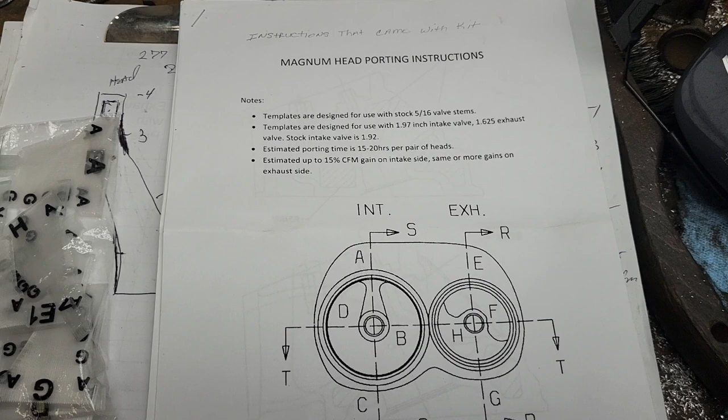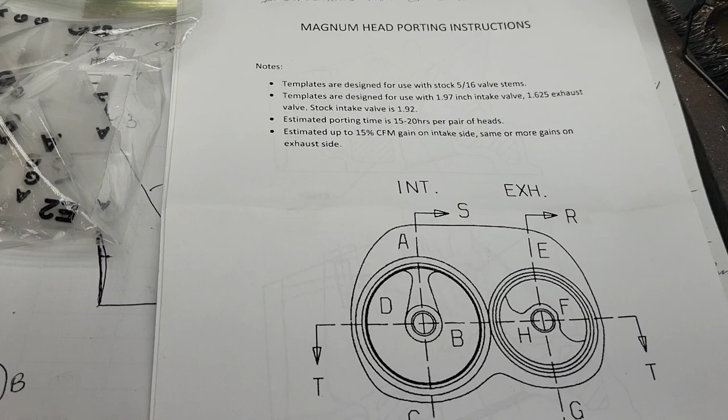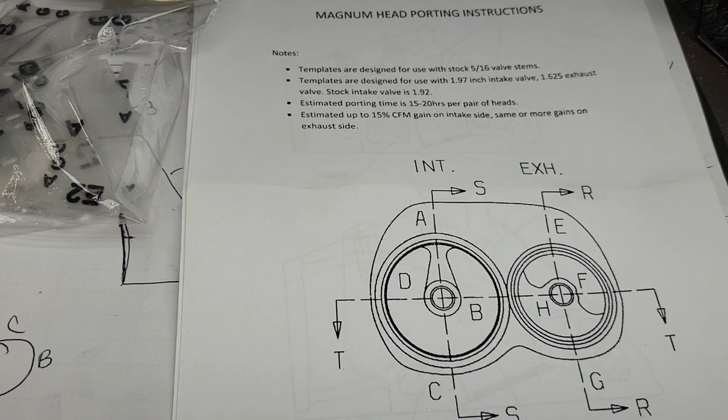Templates for Magnums, and he wanted me to put them in and critique them. Well, I don't know about that, but I do have my junk Magnum that's cracked that I got some good flow numbers out of. I don't remember exactly what they were, but they were pretty good for what it was. And we can compare

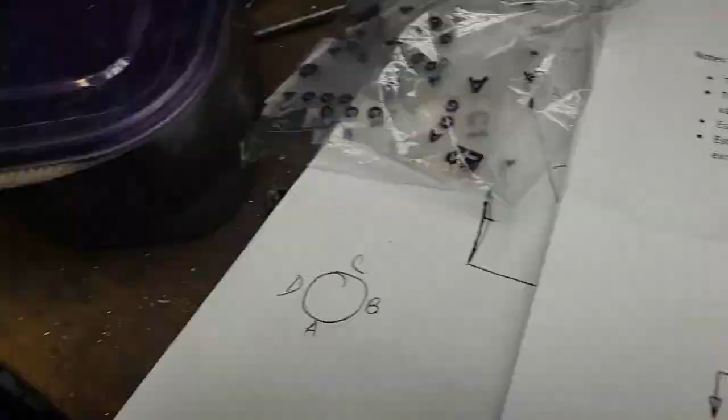These templates to what I did, and we'll see what it looks like. It's got quite an extensive book of instructions. Okay, like it says here, sorry guys, estimated porting time, 15 to 20 hours.

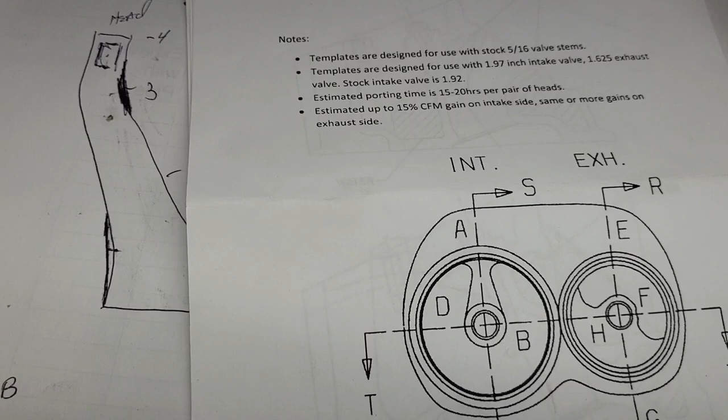Oh, I guess it could be done that quick. I can't, not a chance. I mean that's like a cleanup for me. But then again, I've been accused of a lot of things. Being fast is not one of them. So I'm going to have to pause you guys a lot in order to get in and out of here and do what I got to do, because I got to figure out every single piece, because I don't know which one goes where. And we'll take a look at it all.

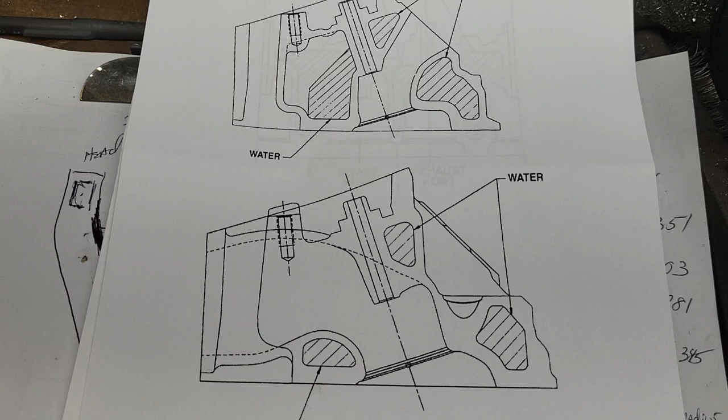Okay, next page gives you the basic shapes. As you can tell, stock shapes are really good on the Magnum, really good. I like the high short side radius. Remember, it's designed for a heavy truck, very similar to the heads I got on the bench right now, the Dart 165s, designed very similar, all right?

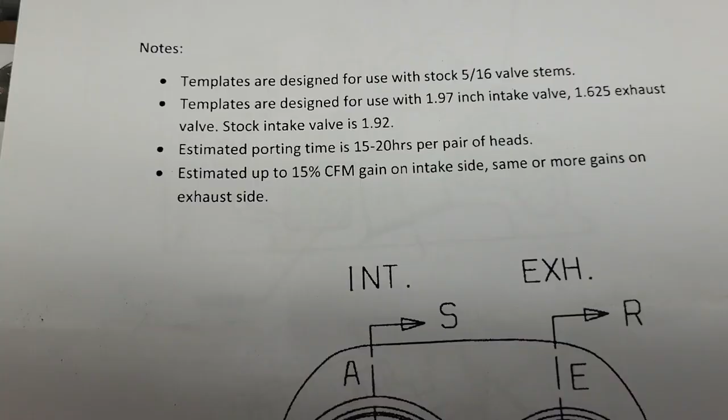The high short side radius definitely helps your mid-range torque. Estimated up to 15% CFM gain on the intake side, same or more gains on the exhaust side. Okay, so they're designed for 5/16 stems, which is what this head is.

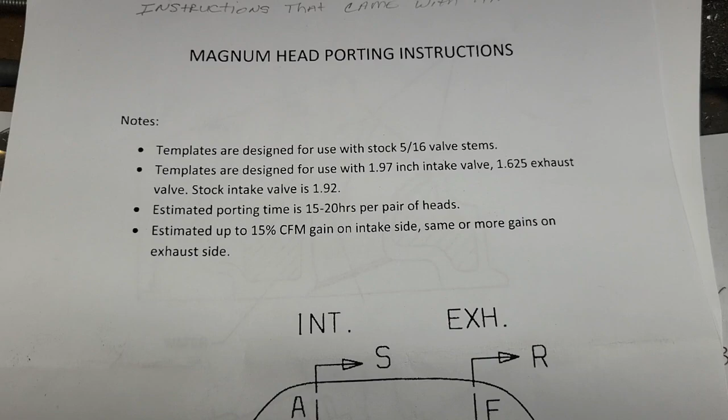Okay, these are designed for 1.97-inch intake valves. I don't remember if I cut these for bigger valves, guys. You'd have to take a look at the Magnum video and let me know, because I'm not measuring them.

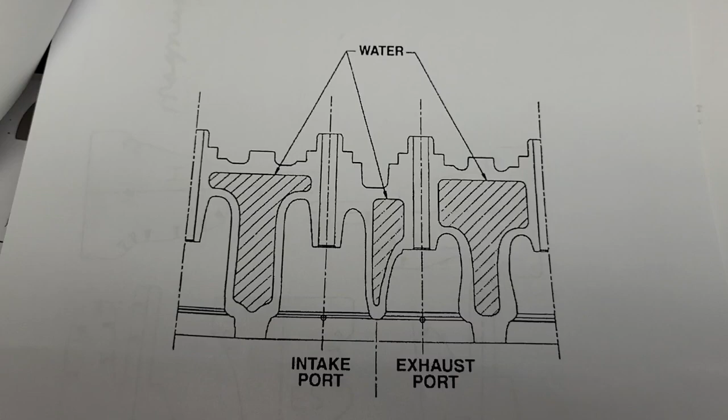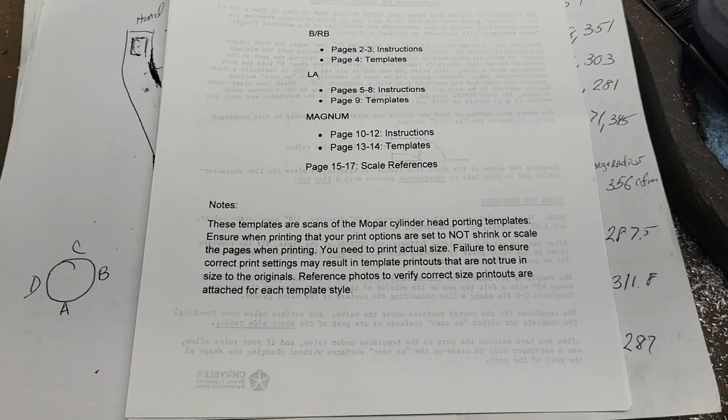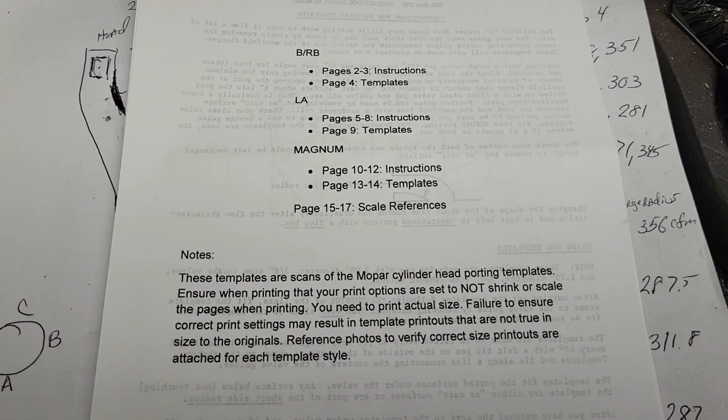Okay, nice drawings of where the water is and the basic port shapes. Looks good. Okay, this is all the different templates that are here. It's quite a bunch of them. Okay, it looks like they have one instruction book for B and RB engines, LAs, and Magnums. So we're going to be paying attention to the Magnums, which is page 10 to 12 instructions and page 13, 14 templates. I think this is an interesting page right here.

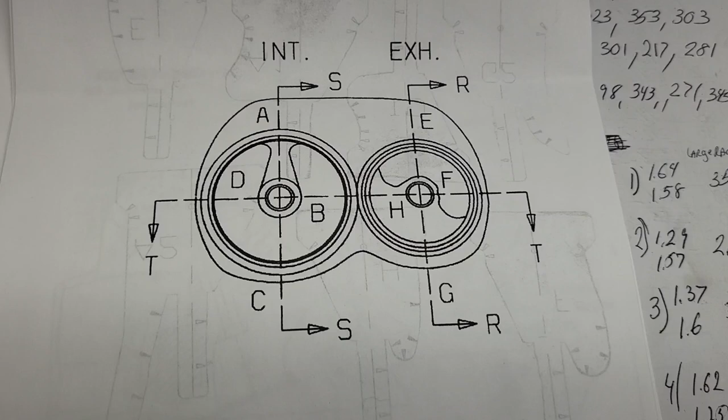Okay, now it says... okay, that's a BRB, sorry. Okay, this tells us exactly which template goes where. We might as well start at A on the intake. Let me find that one. Okay, take a quick look.

Obviously, I used a way bigger valve than the stocker. And our porting template for A, now if I understand the way this works, okay, it should fit in there, but it doesn't, it doesn't even come close. Now remember, this is supposed to be the final shape.

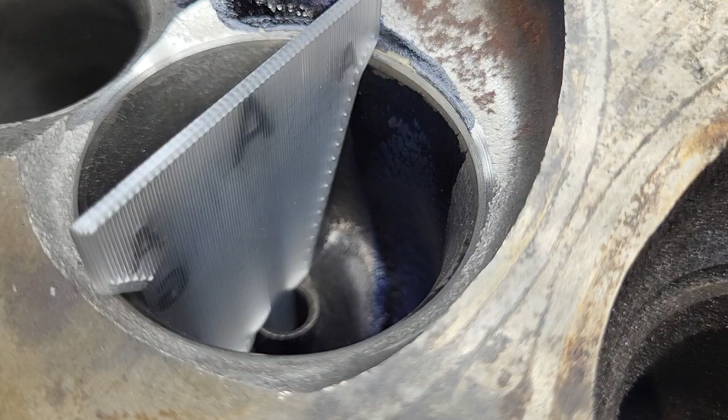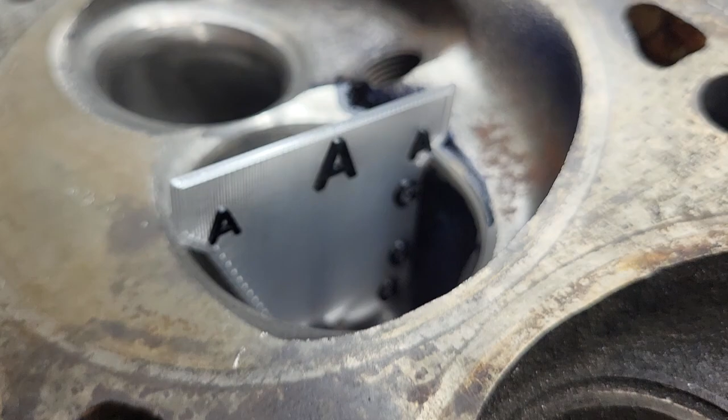Not sure, guys, I don't think that bowl is that shallow. That's not going to be right. Okay guys, now I got it. CCC must be the side it's supposed to be on. Now it's not easy to see, let's see if we can get some backlighting on that. Okay, the stocker won't even fit in.

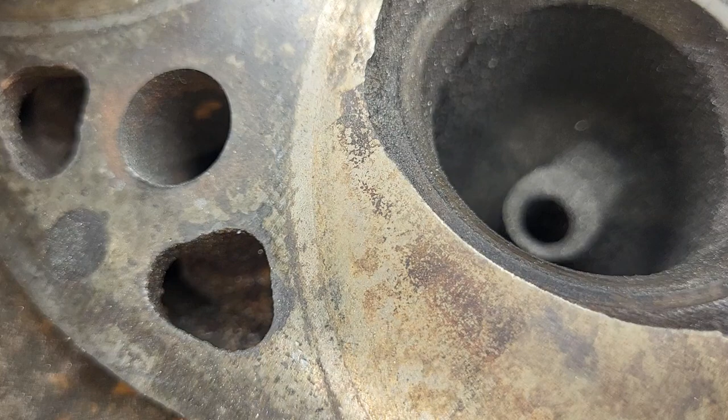All right, this may not be the easiest thing in the world to show you guys. But they've got that bowl much straighter than I do. But remember, I also have this cut for a bigger valve. Okay, they have a very, very straight wall on that intake, if I'm doing this right.

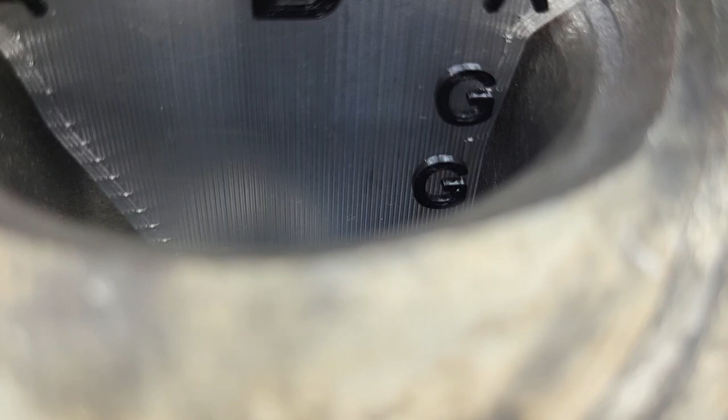Okay, we're going to look at B. Hard to see, but I've got my bowl. Actually, that's got the shape of the wall pretty close to what I did. Let's see if we can get a different view of that. Okay guys, fiddling with my lighting a little bit. Hopefully we can get something.

You can see the tip of that should be hitting the roof. I went a little deeper than that, and I gave it way more area on the roof. Must be somebody walking by with a dog. I made it much wider than these. Let's see what that looks like on a

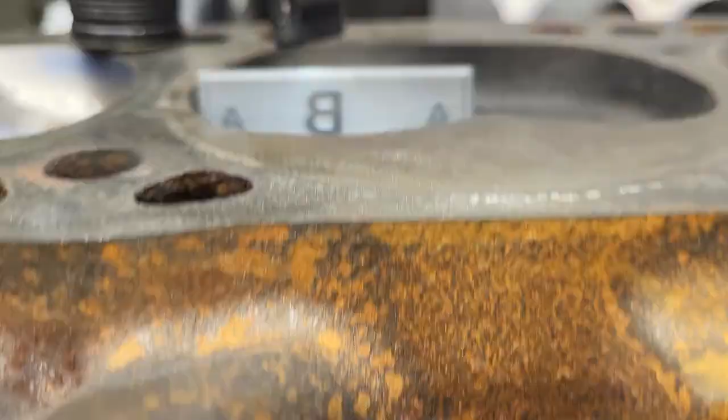Non-modified port. Okay, on the non-modified port, it doesn't even fit, it's still too short. Interesting, right guys?

So obviously they don't want you to do a whole lot on that wall. And this is designed for a bigger valve. Notice it doesn't hit the valve seat, okay? So they're not looking to expand that wall out too much.

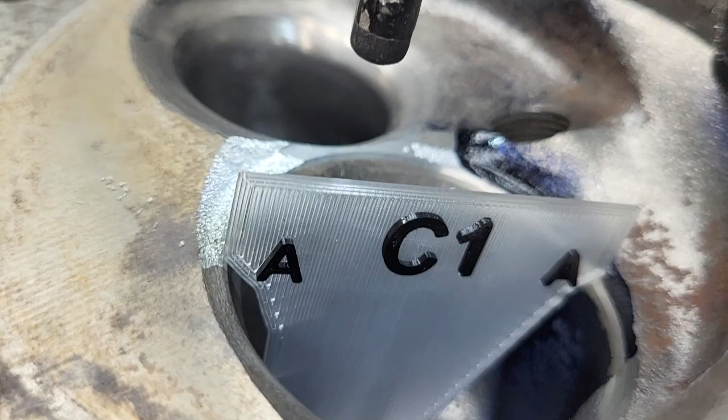Okay, this is template C1. Now it's showing us the shape of the short side radius. They've got their short side overhanging more than mine, but remember, it is also for a smaller valve, so that kind of makes sense, right guys? Let's see how it looks on the stocker. Looks like it fits the stocker perfectly.

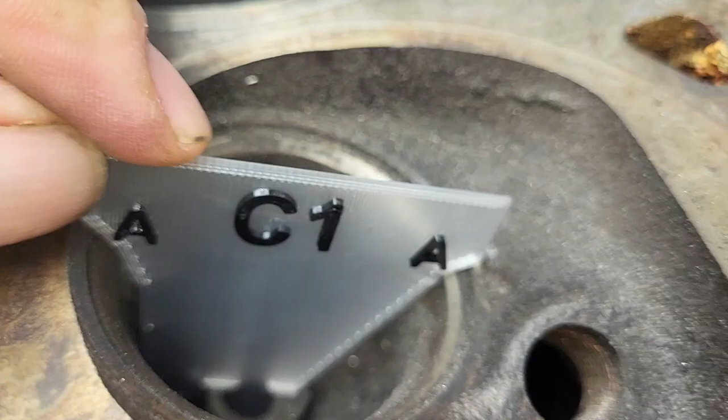Okay. I almost forgot, this has got a tail on it to show you how high to make the roof.

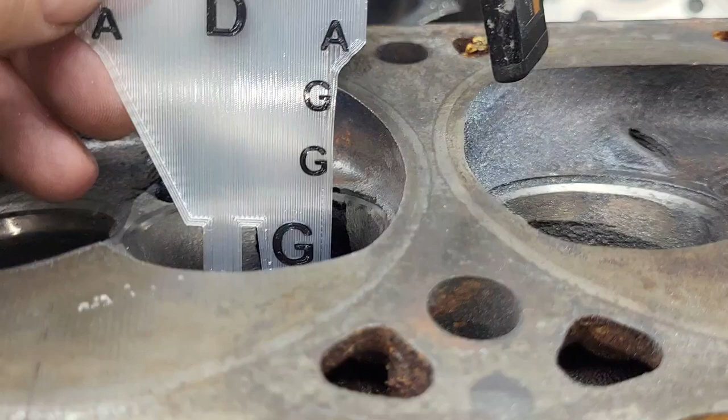I obviously did not raise that roof much, if at all. Okay, it looks like I made another mistake. This is D, this is the outside of the bowl. Okay, that fits. That's a lot closer to what I did.

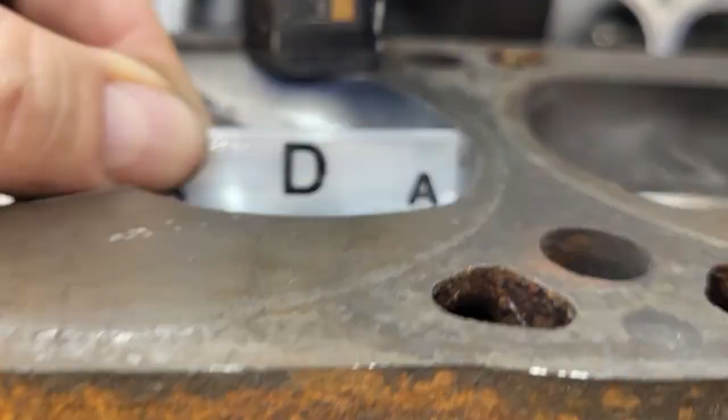Let's move our lighting a little bit. That's a lot closer to what we did. Okay, a lot closer, and it fits. It fits the height. Almost perfect.

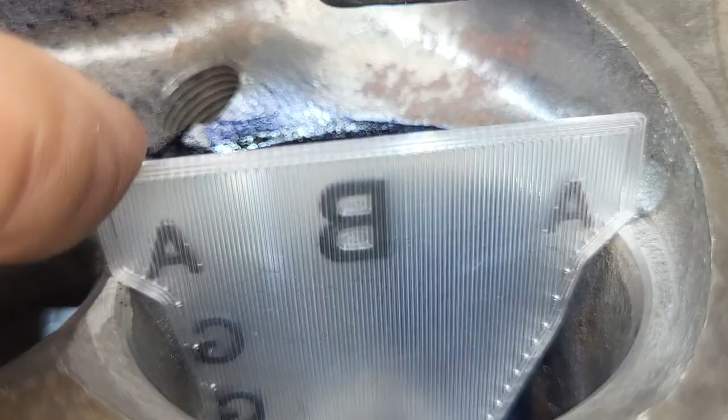So you can see I gave it a little extra area. Now we have to do A again because A was wrong. Okay guys, my mistake, it's the B that I goofed up. Now you can see how much closer that is to my design. It's very close. Okay, let's take a look.

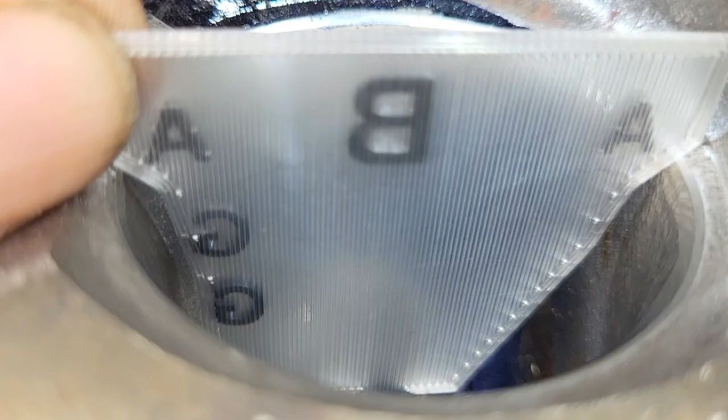See how they did the roof. Tough to see around that crazy shape of that port. The roof is almost the same height as mine. Mine's just a little bit taller.

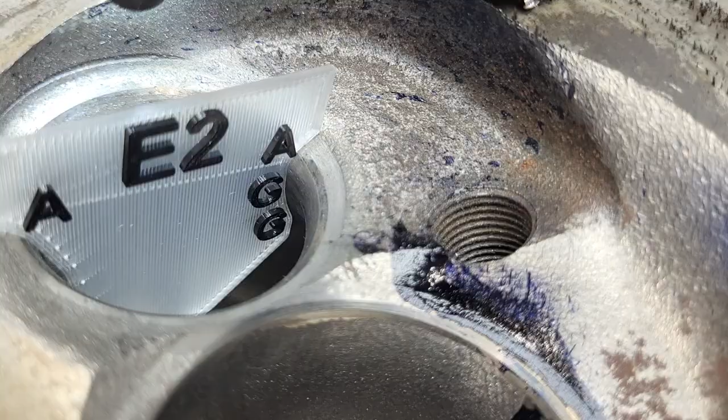Okay, now I remember on the exhausts I didn't have to go crazy to get really good flow numbers out of these, and it looks like it's pretty close. Yeah, I may have knocked my short side down a little bit more than they wanted. And it looks like my throat is about the same, but my bowl shape is a little bigger.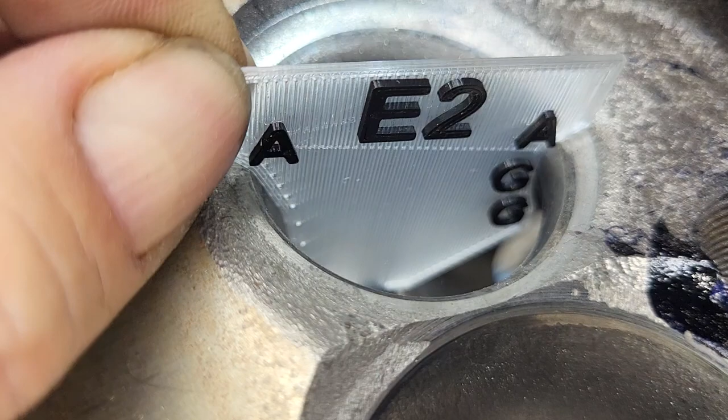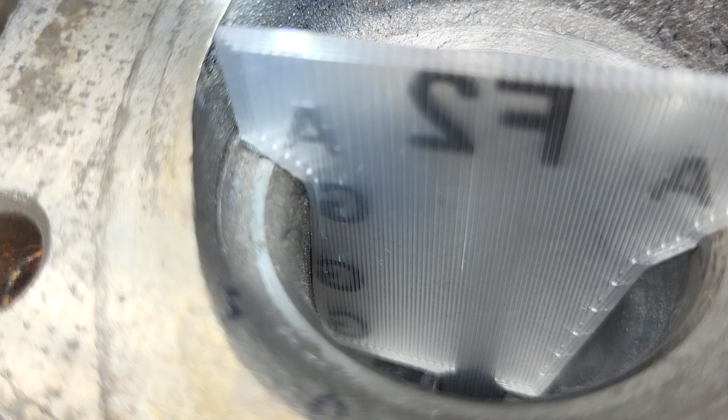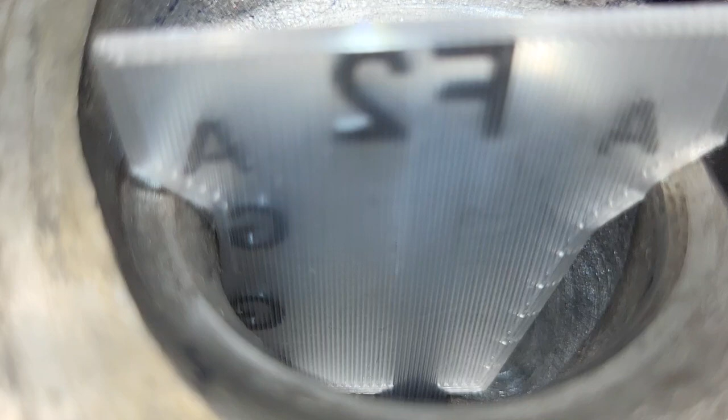You know, I didn't show the last one next to a stock bowl. I really should do that. Okay, you can see the outside wall pretty close to what I designed. Now the other wall, the inside wall, looks like I took a lot more metal out of.

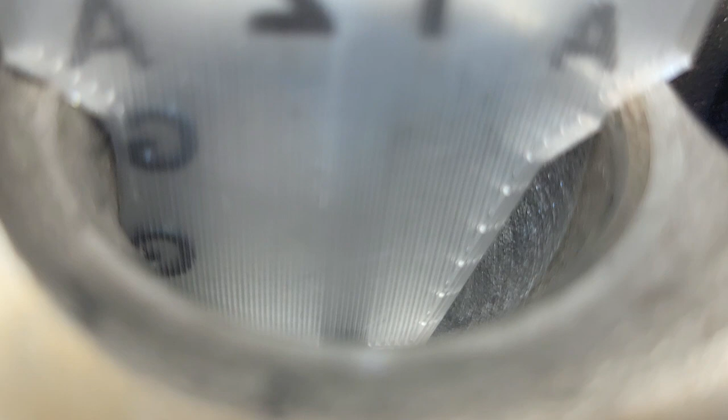Okay, not even close, unless I'm goofing this up. Now see, this is F2. Not sure why I have an F1 and an F2. Okay, we're going to look at the F1 on the stocker.

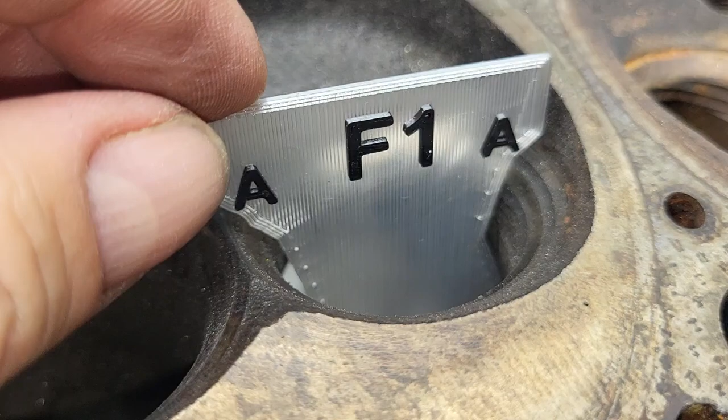That's pretty close. It doesn't fit all the way down because it needs to be opened up at the bottom. So let's try them both, because I'm not sure which one's which, guys. Gotta go on this side. If you don't have the orientation right, it ain't happening.

Okay, F1, I think. Let's flip this head over. Okay, that looks correct. And they actually want that a little deeper than I made it, because you can see it's not quite hitting the guide, unless I lowered the guide, which is possible. And we're hitting the seat good, so I guess that's where it's supposed to be. I may have lowered that guide a touch.

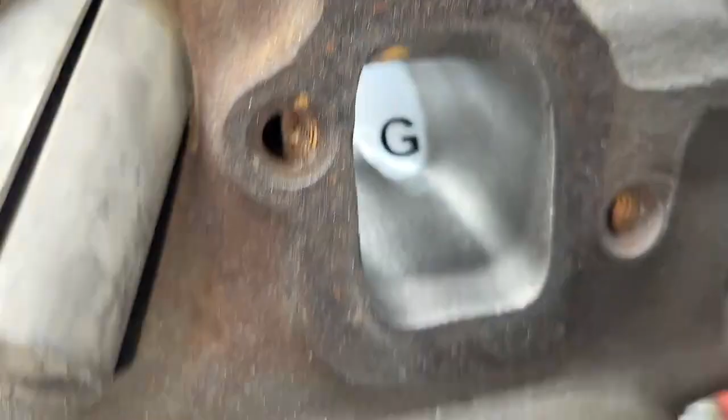Now see, that doesn't show... Okay, I think I know what they did. They're using F1 to show you this point G, and the F2 is showing you the wall. Because they can't put them both on the same shape, obviously. It probably won't fit in.

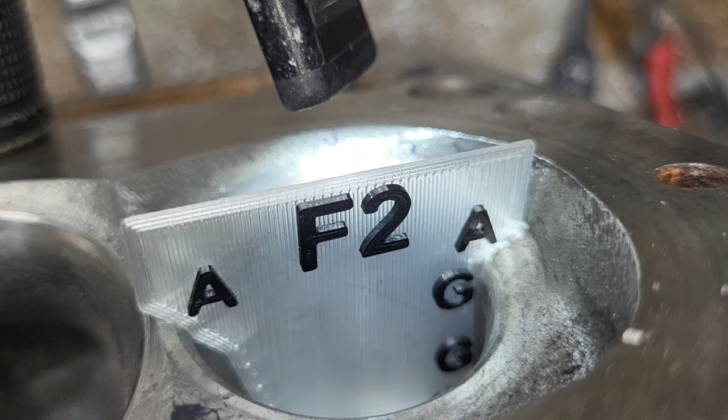Okay, so this doesn't have the bottom, but it fits my bowl really close, really close, okay. Pretty cool. Alright, it takes a little figuring to figure out which one goes where. I wish the directions were a little better.

Or maybe if I was able to read, I could do better. But you know, if I could read, I'd have a better job.

Okay, they've got slightly different shape on the back side of the bowl. And then mine, not a huge difference. Now I'm not sure why they have, it looks like a big dent at the very top. I don't know why they would do that.

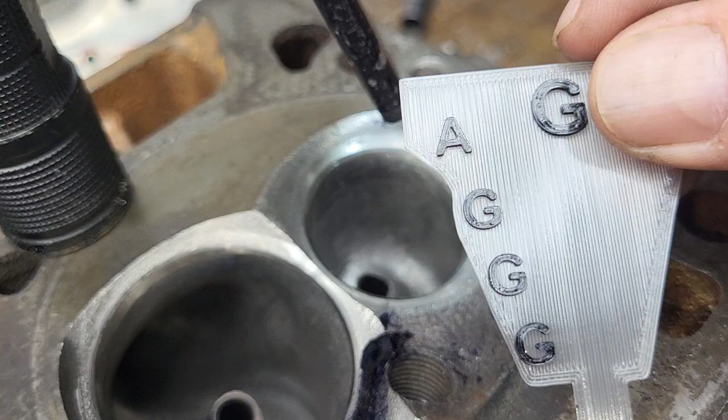They're using that as the Venturi, and then they're opening it up. I kind of like it having it blend right from the Venturi into the port myself.

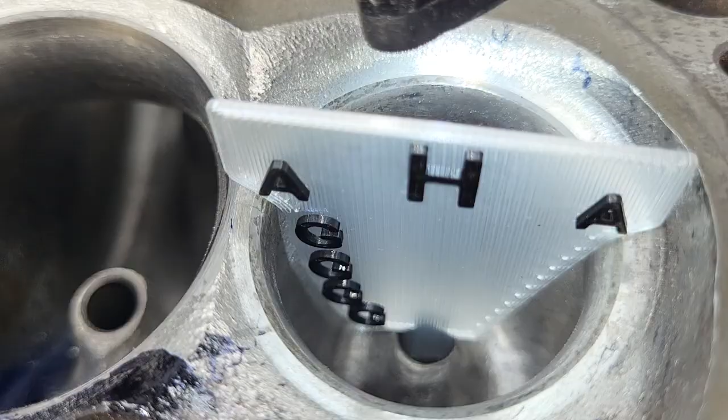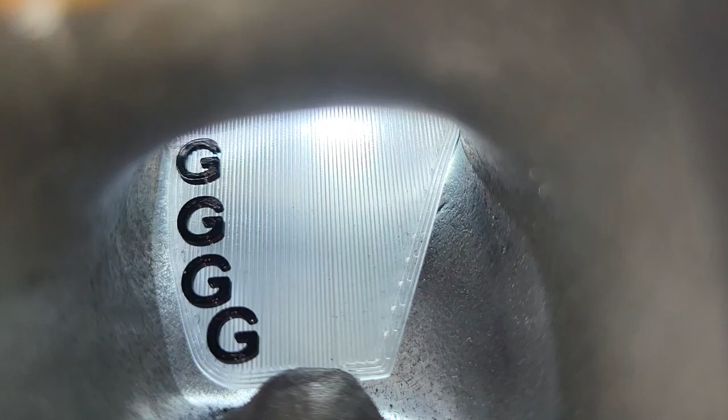Okay, you can see the H, which is our inside edge of that exhaust. Let's move this around. Okay, not bad, mine's a little bigger on that side. Let's see what we got.

We got one more plate. Let's see if we can figure out where that goes. Alright guys, I think I figured this out. I made my roof just a tiny bit taller than this.

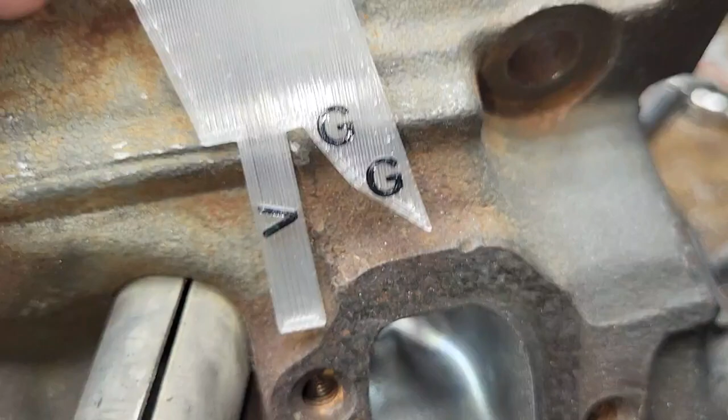Okay, this is our E1. So there was obviously an A and a B. Okay, one has the curve of the bowl and the other one has the roof height.

Alright guys, sorry for the jiggly camera and me being confused, but hey, I'm confused a lot, especially after being in the heat all day. Yeah, not good for me. It's Florida, it's already hot here. The garage is already smoking.

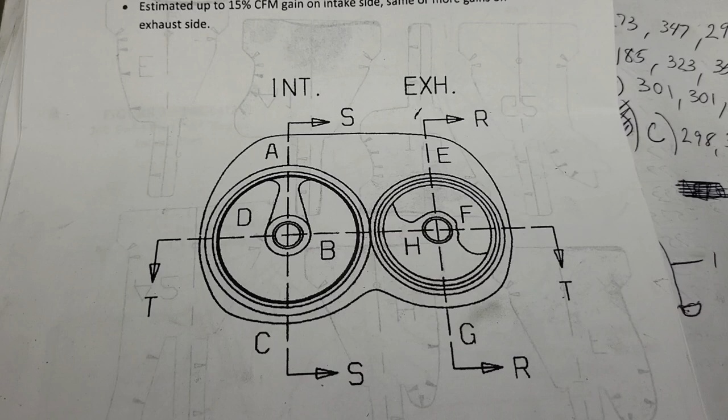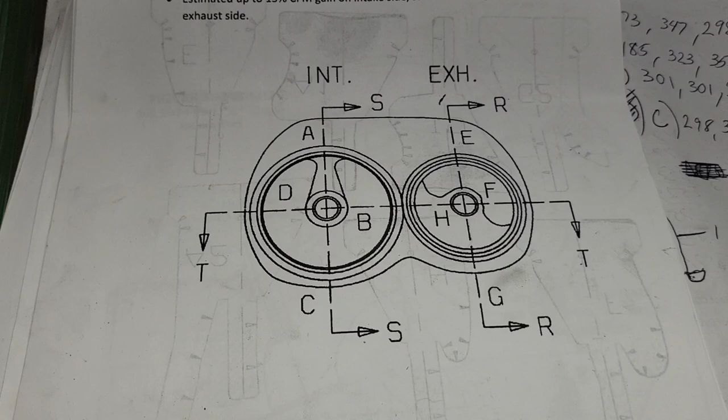Alright guys, so what did he actually ask me to do? He asked me to critique these. Overall, they're not very much different than how I designed the ported ports, and I know they flowed really well.

I was actually impressed how much I could get out of a cracked Magnum. If they weren't cracked, I would really like these a lot. I bet I could get a lot more out of them too with a little bit bigger valve. But I'm not going to work on stuff that's going to crack. Sorry, I'm not doing it.

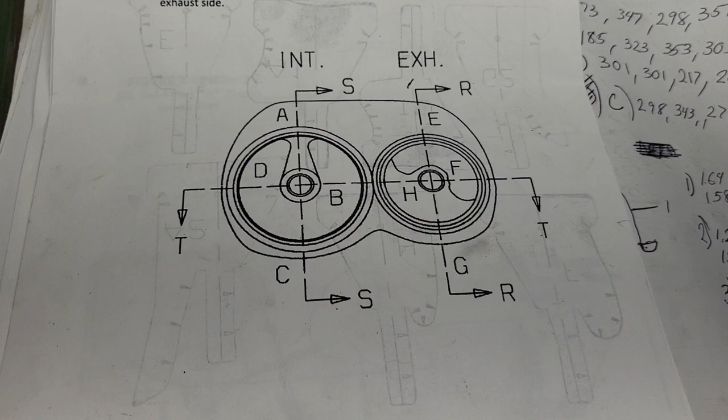Won't do it on Chevy Vortec either. Aftermarket Vortec, sure, no problem. Bowtie Vortec, no problem. I've done aftermarket Magnums, but unfortunately the heads were made in China. They were not great. They took a ton of work to get up where they needed to be for a serious street engine.